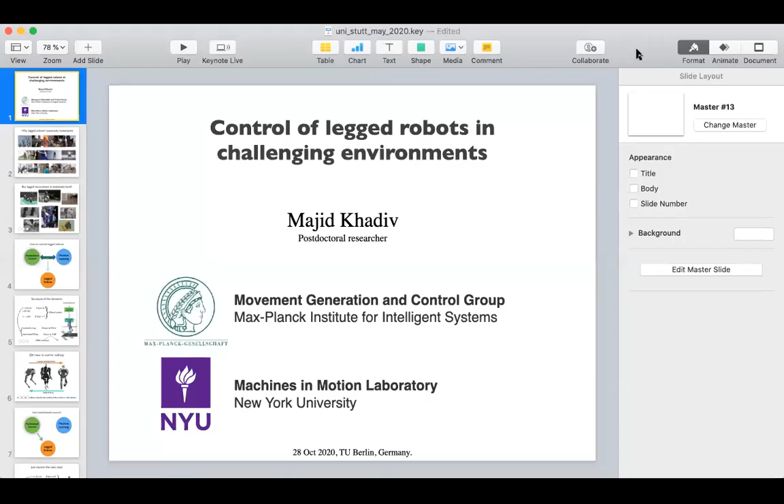Yes, perfect. Okay, great. Thank you so much for having me today. So today I'm going to be talking about control of legged robots, especially in challenging environments.

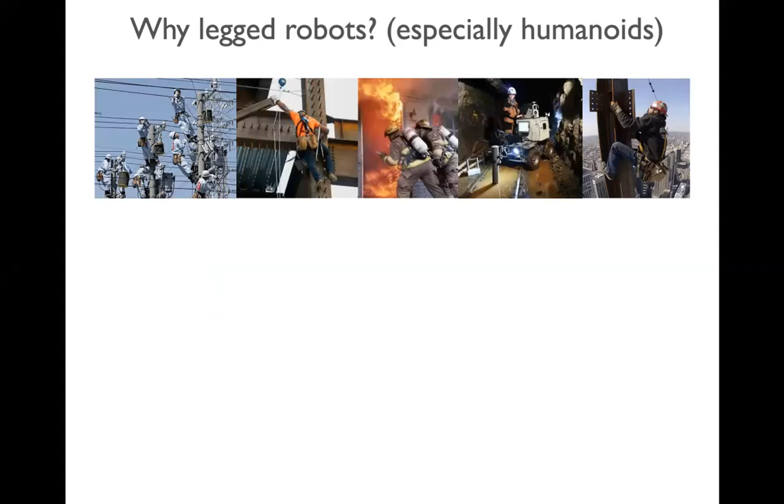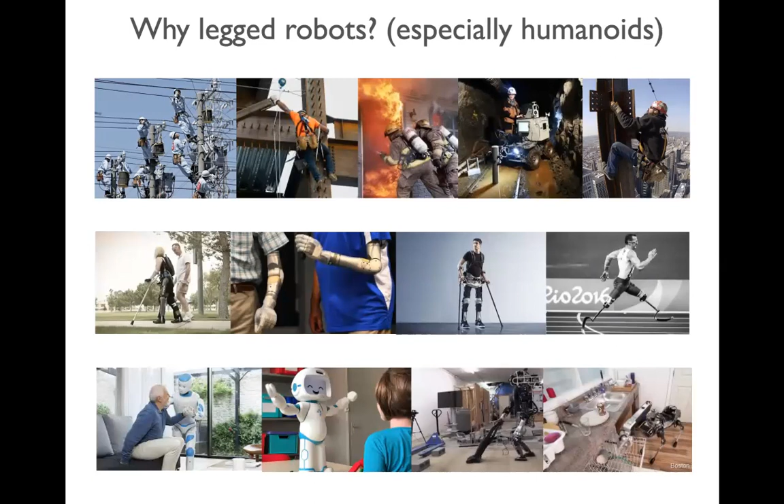But the first question is, why legged robots? If we look around ourselves, we can see that there are a certain number of jobs out there that are very dangerous for human beings, but at the same time, they need a certain amount of dexterity like human beings. The research we do in legged locomotion and the knowledge we gain can be used to design and build exoskeletons and prosthetics. Also, humanoid robots can help elderly people, they can be used to teach our children, to entertain them, used in home care services and so on and so forth. So with this picture, we can see that there is a huge amount of applications out there for these robots, given that these robots are able to show some performance close to or comparable with human beings. But the problem is that legged locomotion is extremely hard.

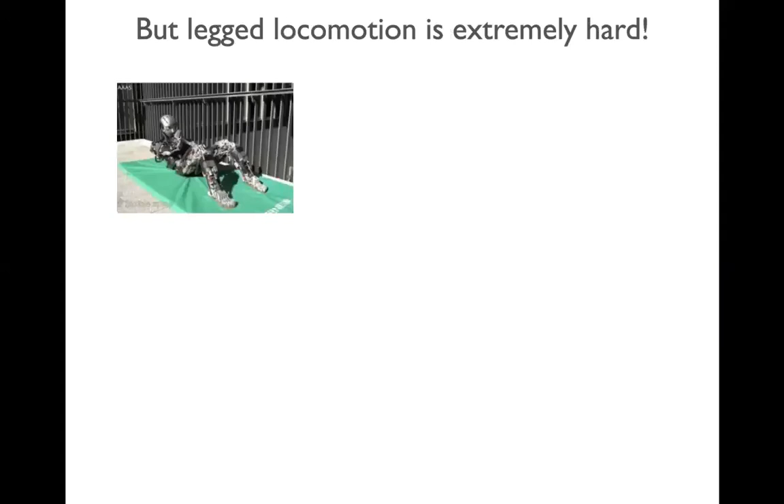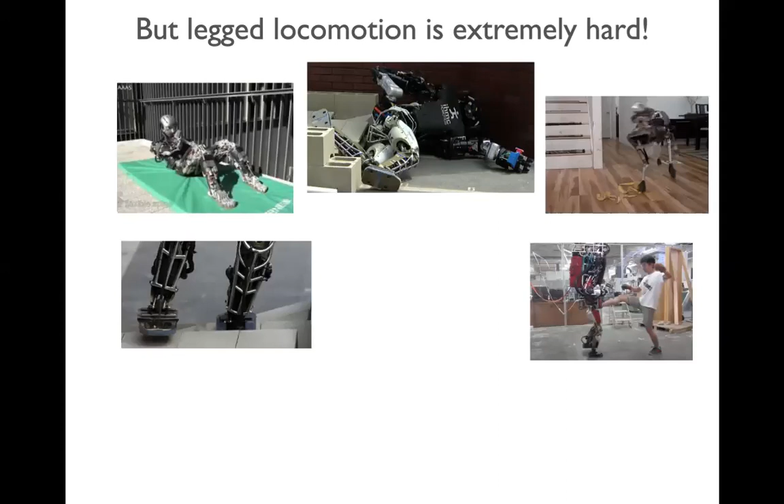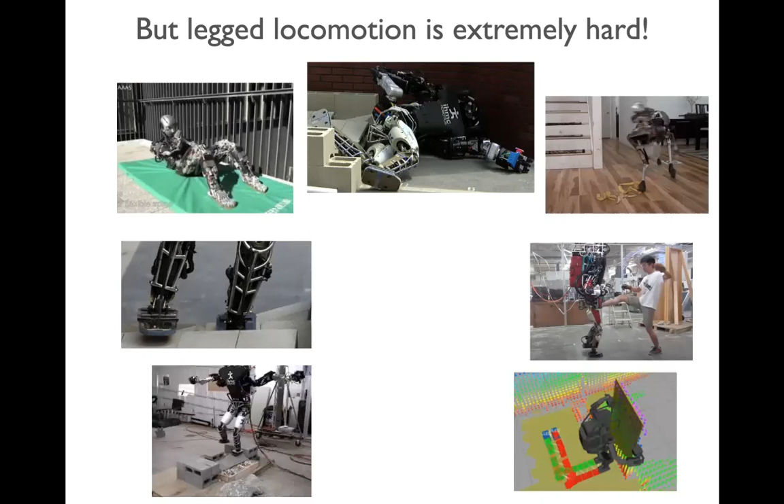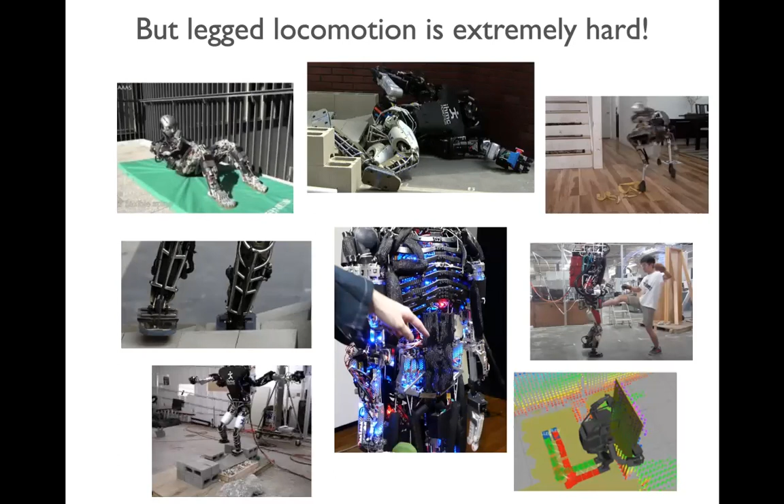Why is it hard? Because first of all, these robots have unilateral contacts with the environment with different parts of the body. They are inherently unstable, which means they can easily fall down if not controlled properly. They have state-dependent switches, and they need these switches in order to move their body in certain directions. They can be prone to external disturbances, environmental uncertainties, perception uncertainties. Also, the contact forces can be even more limited in certain situations. And finally, these robots have many sensors and actuators, and these should be working simultaneously, synchronously, such that the robot is able to achieve a desired task. So it's really hard to control humanoid robots in general.

The way I tackle this problem is by using a combination of model-based control and machine learning to control legged robots. Okay, let's take a look at the structure of the dynamics.

These robots have a continuous part of the dynamics, which is an ODE, and we have a constraint on the actuation since actuation has some limits. This is valid as long as the robot is not on the switching surface. But as soon as there is a switch in the contact location, there is a switch in the dynamics, and the robot might experience a jump in the states, which is due to impact. So this system is in general a hybrid system.

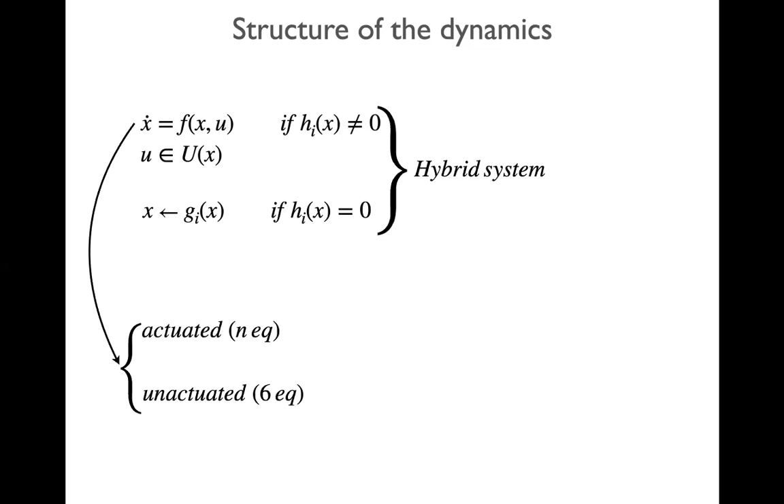If we take a closer look at the continuous part of the dynamics, we can see that we have an actuated part and an unactuated part that we can separate. The actuated part is simple, it's like manipulator dynamics. So we have torque at the joint, and we can use this torque to exert force to the environment. So this part is fine.

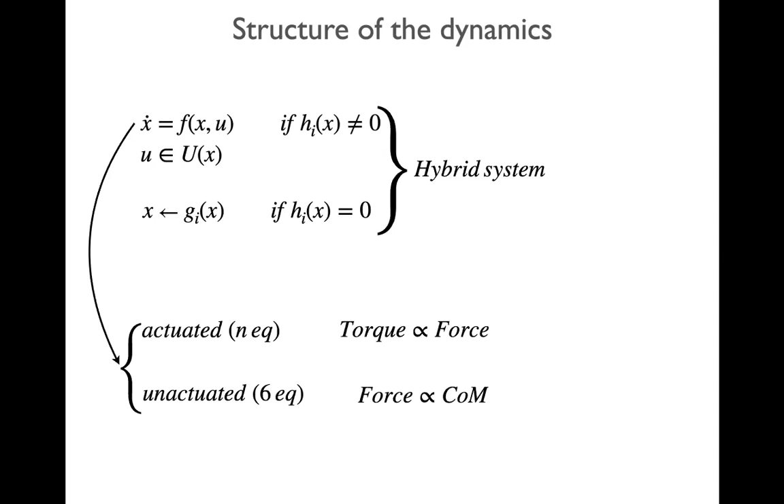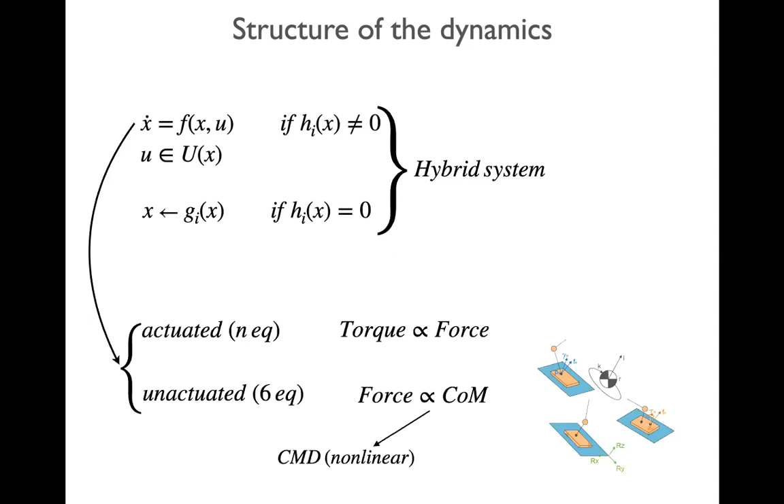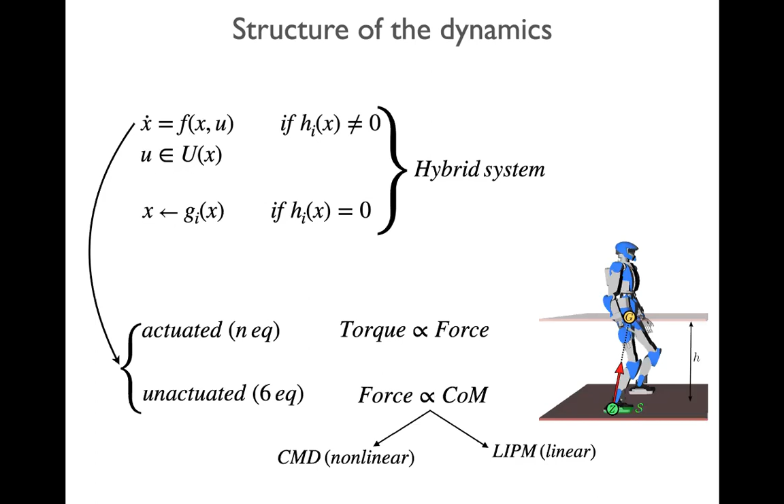The unactuated part is the main problem, since we need to exert some limited amount of force to the environment to control the center of mass motion. These dynamics can be captured using centroidal momentum dynamics, which says in order to control the center of mass, we need to control the sum of contact forces on the environment. So this is a nonlinear, non-convex dynamics in general. However, there are certain linearizations or simplified versions of this dynamics. For instance, if we say the height of the center of mass is fixed and there is a negligible rate of angular momentum around the center of mass, we can use a linearized version of this dynamics to plan motion for this robot.

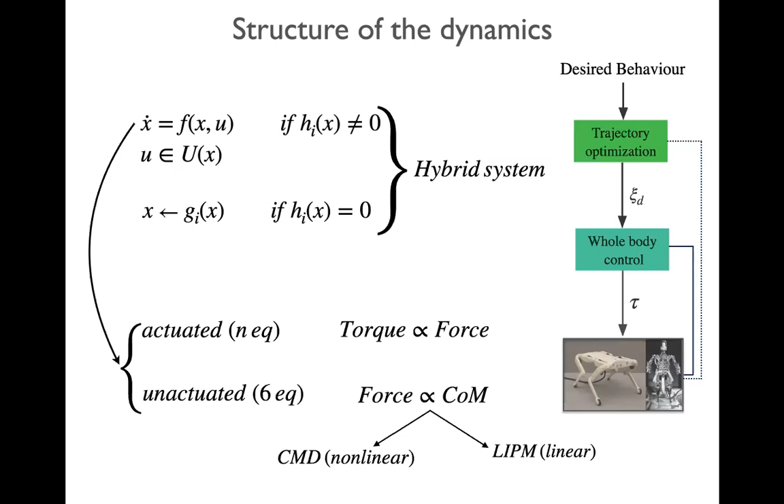And this is the normal control pipeline we use to control these robots. So we are given a desired behavior, we generate trajectories for the most important parts of the robot, which are the end effectors and the center of mass. Then we have a whole body controller that stabilizes the system around this trajectory using feedback. The trajectory optimization part can be done either offline, but if we can regenerate motions very fast, we can use it inside an MPC loop.

So the first question I would like to tackle in this talk is how to control walking. We have different types or different designs of humanoid robots in terms of leg design.

On the right, for instance, you can see Hermes, which is a fully actuated robot with ankle joint, with toe joints. All of them are actuated, and the system is kind of heavy, but it has full control authority and the contact forces.

So the problem with this robot is that the leg is heavy, so we cannot achieve very dynamic motions. On the left, however, you can see a minimal design of the leg. So the robot doesn't have any ankle joint, it doesn't have any ankle actuation, the legs are light, so it should be able to do very fast motions.

But at the same time, the control of contact forces becomes very challenging. The robot might rotate around the normal axis to the environment because there is not enough rotational friction available for this robot.

So a trade-off design would be the robot in the center, which has unactuated ankle, but it has a foot, and this foot can generate the rotational friction, but we don't have full control authority at the contact.

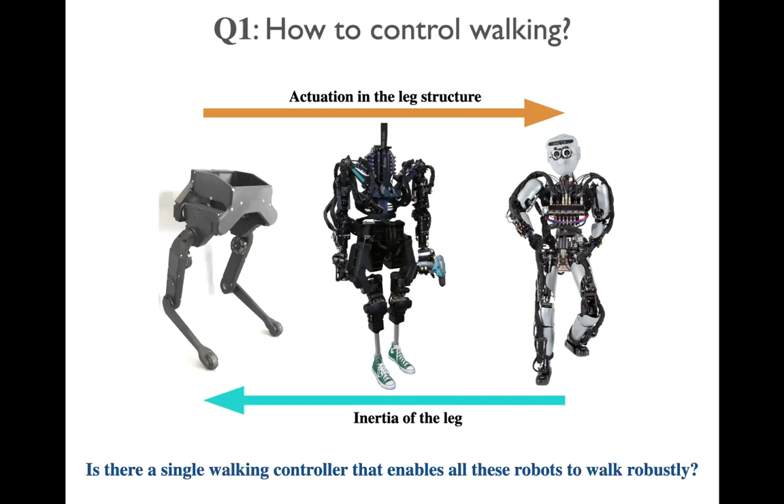The question I would like to answer is, is there a single walking controller that enables all these robots to walk robustly? My answer or my approach to this problem is model-based control.

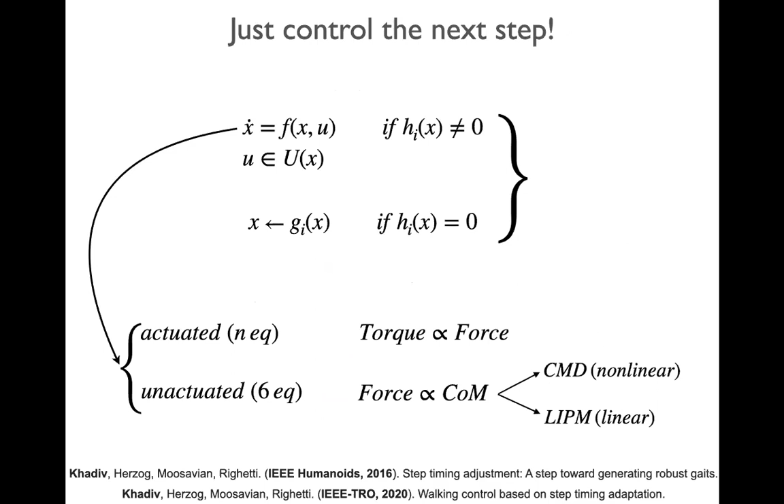So if we go back to the equations here, because we want to tackle only walking, we would resort to using simplified dynamics, which is LIPM, which is a very good model for walking motion. And here the idea is that rather than controlling the continuous part, we only rely on the switching part of the dynamics to control walking.

So the idea is that if we only control the location and time of the next contact switch, we should be able to control walking and stabilize the unstable dynamics of the center of mass.

So this is the main idea here, because we want to control all these robots, and some of them don't have enough control authority to control, for instance, center of pressure. So what we propose to do is to only adapt next step location and time as a function of feedback to control these robots.

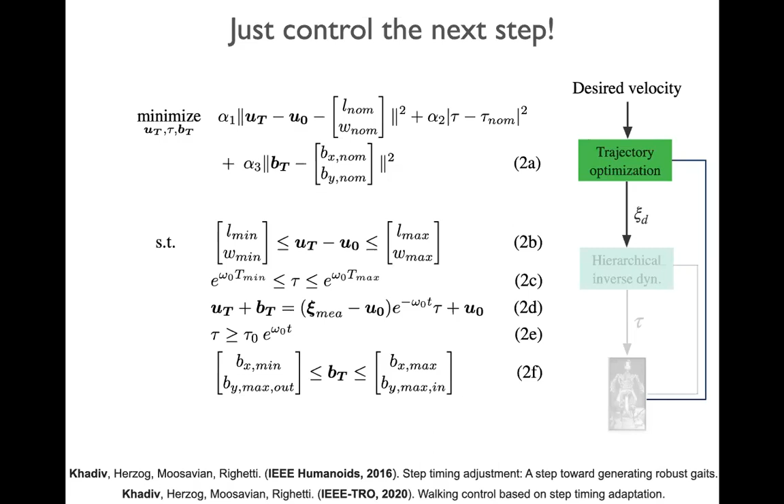And with this formulation, we can adapt very fast next step location and timing. We can then find the swing foot trajectory to land at a certain time, at a certain position. And finally, we pass all this trajectory to a whole body controller.

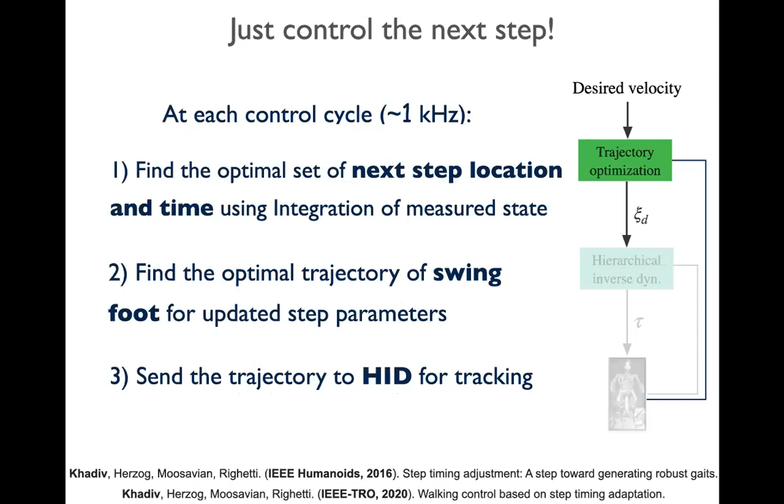Here, we use hierarchical inverse dynamics for tracking these trajectories. I implemented this on a robot in simulation.

And here the ankle is not actuated. We were able to generate very robust motion in the presence of different external disturbances, just by adapting next step location and timing using the measurement of the center of mass states.

So the main thing that we showed in this work is that timing adaptation is really important. It had been ignored normally because it renders the optimization problem non-convex. However, we showed that with this novel formulation of the problem, we can find a convex optimization problem that adapts both step location and timing.

And this timing adaptation gives a kind of exponential push recovery capability compared to not adapting it. So the features of the planner: there is no need to explicitly control center of pressure or center of mass. So we don't care so much about the continuous part of the dynamics.

We are able to, just by looking at the next switching manifold, which is the next step location and timing, guarantee viability, the ability to ensure there is at least one control sequence or solution to the problem that doesn't lead to failure. And finally, we can do very fast replanning with step timing adaptation.

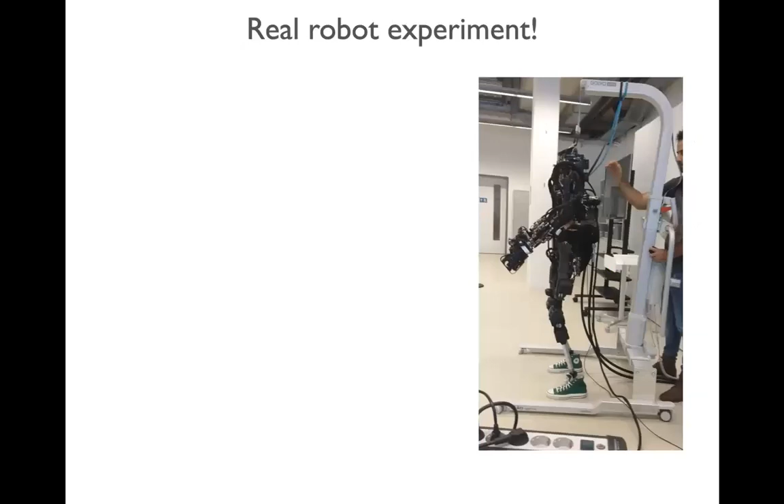I started to implement this on the robot, and this is how far I could get. The robot is doing only balancing here with inverse dynamics. We couldn't go further because of many hardware problems we had. I need to be very careful with these robots, which are hydraulic, as you can see in the video. We also need a couple of people to work with this robot, so it's really hard to manage and do fast, dynamic experiments on the system.

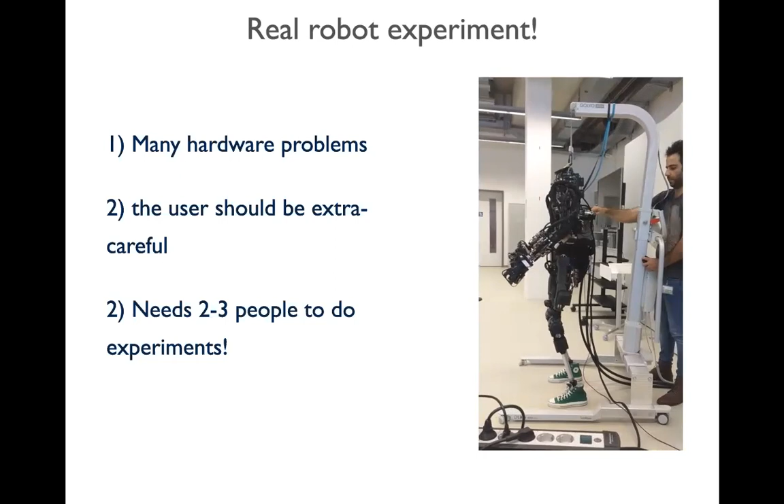So this year, with Felix Grimminger, a mechatronic engineer in our lab, we wrote a proposal to build a new biped robot that is easier to handle. It's based on off-the-shelf torque control components and 3D printing materials. The idea was: can we build a robot able to do very dynamic motions like this?

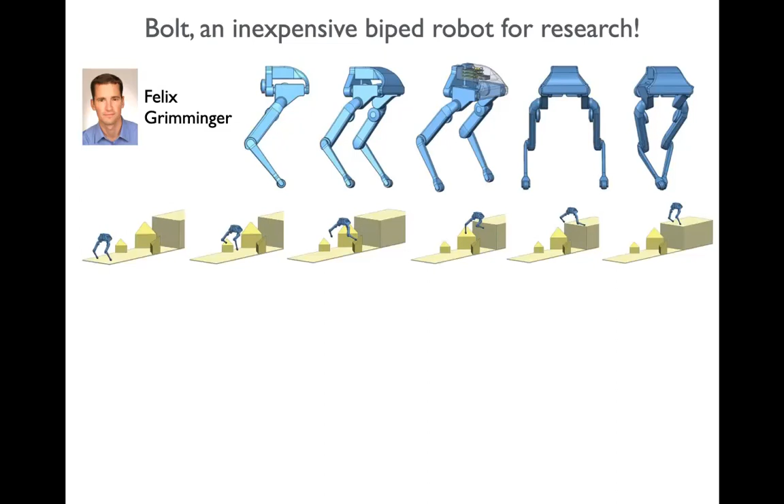We built the robot in February, and this is the first test we did on the robot in March. Finally, a couple of weeks ago, with the help of Elham, a bachelor intern in our group, we implemented the algorithm with a bit of modification on the real robot.

So this is the robot Bolt. It is stepping forward and backward in this video by only adapting next step location and timing based on the measurement of the center of mass dynamics.

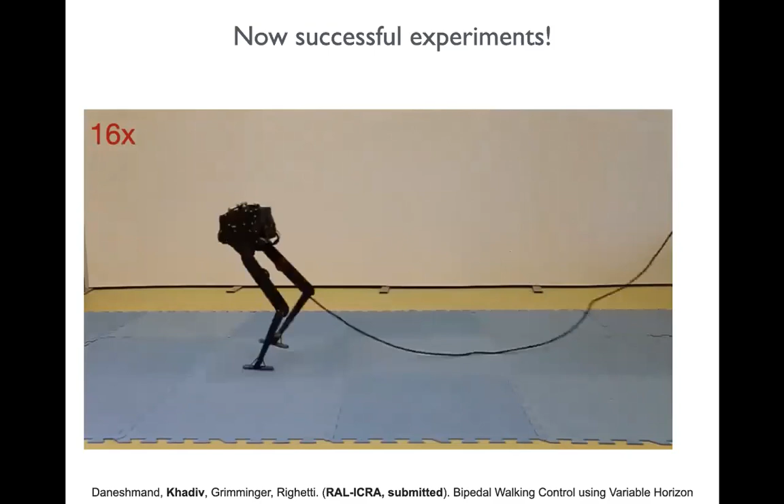This is, for instance, 10 minutes of testing without any pause, and the robot is stepping robustly, tracking the velocity forward and backward. Also, sometimes I pull the robot using this wire as a disturbance.

The second experiment is uneven terrain. The robot is not aware of all these obstacles and the path. But thanks to the torque control and adapting next step location and timing, the robot is able to deal with this kind of uncertainty.

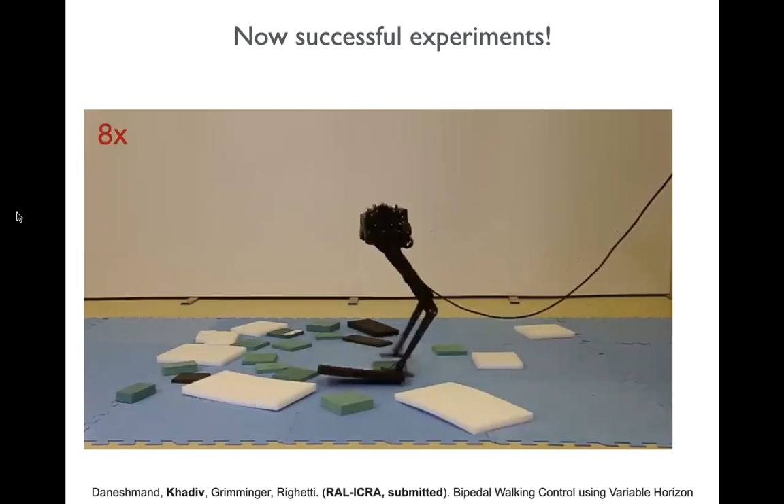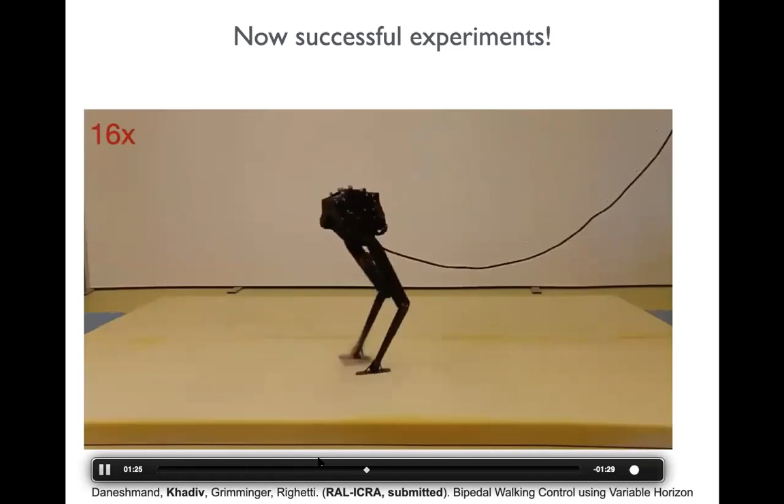I'll move forward a bit. The third surface is a soft surface. In the controller, we assumed that the surface is rigid, but here we have a kind of soft surface that causes a bit of oscillation in the robot motion, though the controller was robust enough to deal with this uncertainty.

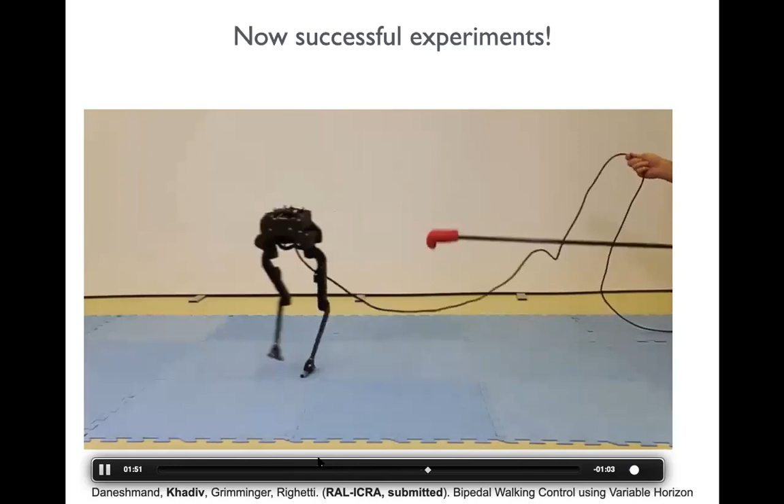Then we have some push recovery scenarios. We are pushing the robot in different directions, but thanks to the MPC implementation and very fast replanning, we are able to adapt the next step location and timing to recover from this disturbance. Here is the push recovery in the sagittal, or frontal, plane.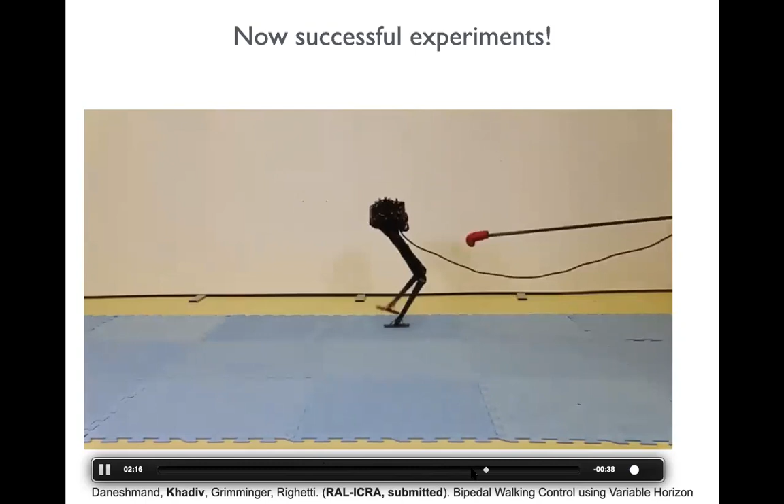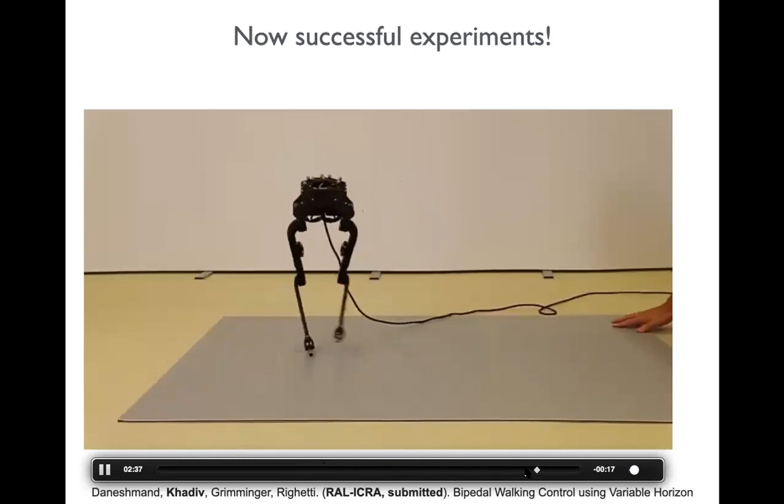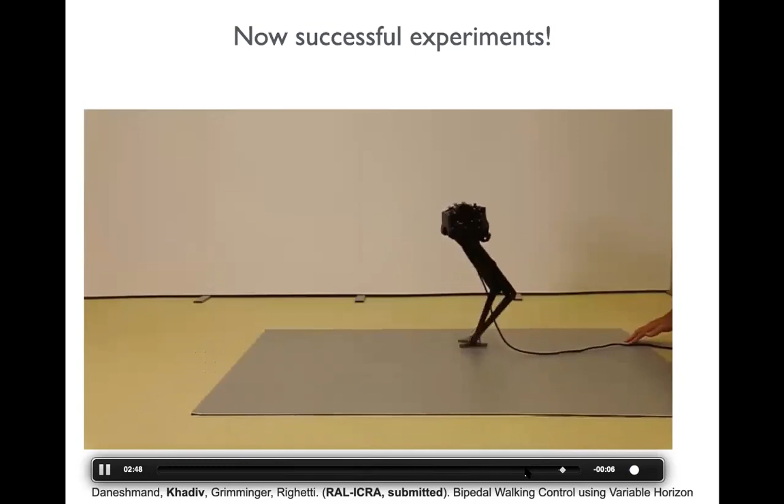Finally, we have slippage recovery, which has not been done in the literature on bipedal robots because it's a very challenging task. But our controller is able to do this. I'm moving the platform randomly, and the robot is able to adapt its next step location and timing to recover from this disturbance.

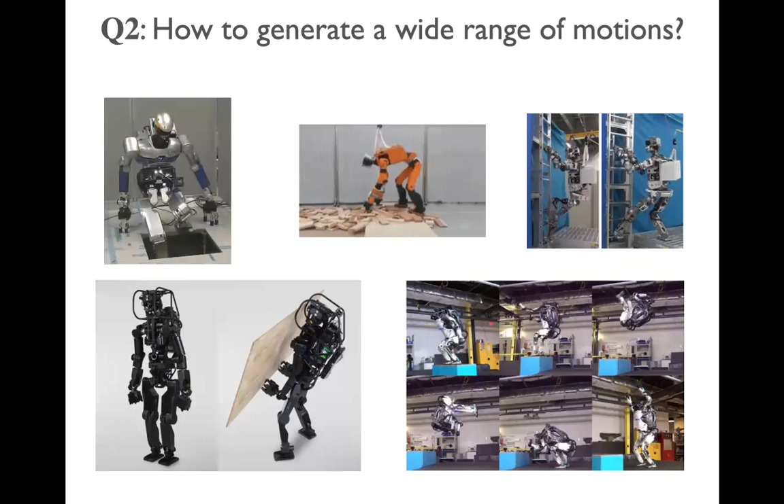Okay, how about if we want to generate more complex motions? If we want to do multi-contact motions with legged robots, climb a ladder, manipulate an object while walking, or do very dynamic motion with a flight phase, like a backflip or something like this, we can no longer use LIPM. Again, I propose that we use model-based control.

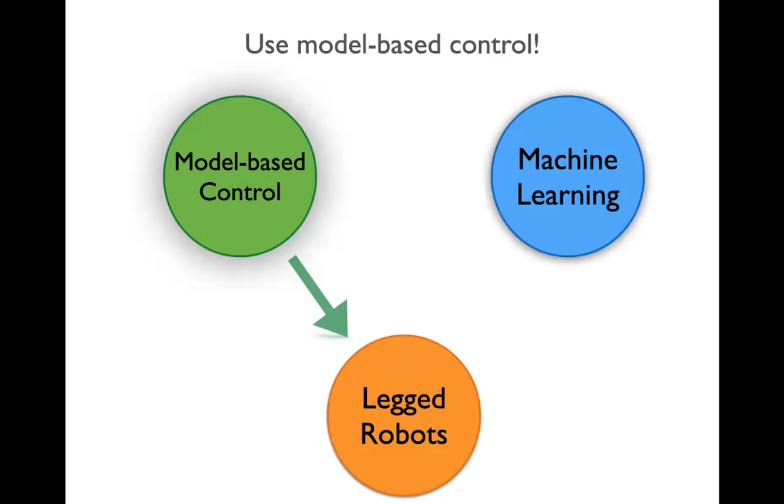Here, rather than LIPM, we use the full centroidal momentum dynamics, which in this case is non-convex and non-linear. We also need to control the continuous part of the dynamics, because we need more control authority on the motion, since these motions are more delicate than walking.

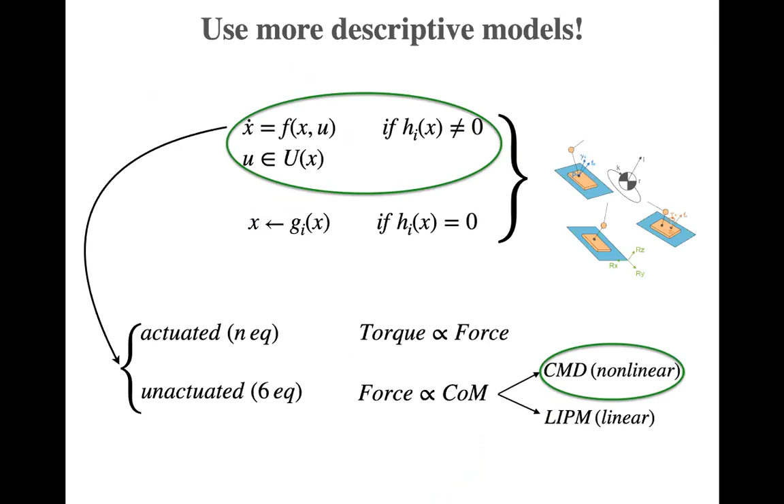For the trajectory optimization part, we write down the centroidal dynamic motion planner. The main thing here is that we want to generate trajectories for the center of mass, momentum around the center of mass, and contact forces. The main constraint of this problem is the centroidal momentum dynamics, which is non-convex, and the rest are some linear constraints that we can enforce.

Thanks to the solver that Brahayam, a PhD student in our lab, developed, we can solve this non-convex problem using a sequence of convex approximations that helps us solve it very quickly.

Then, once we have a trajectory for center of mass and momentum, we can do one full pass of whole body inverse dynamics or inverse kinematics around this problem, and we enforce the whole body constraints like joint constraints, torque constraints, etc.

By iterating between these two solvers, centroidal and whole body, we try to come to a consensus in terms of momentum around the center of mass. As soon as they come to a consensus, it means we have a trajectory that is consistent with the constraints in terms of contact forces and whole body constraints, like joint torque, position, and velocity constraints.

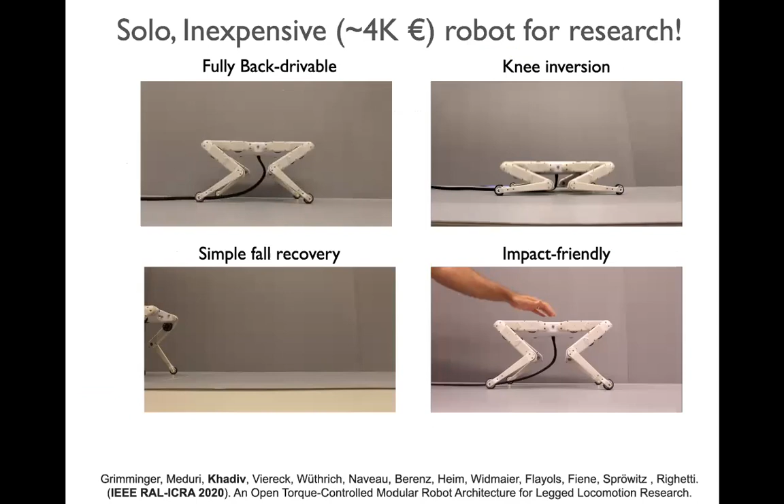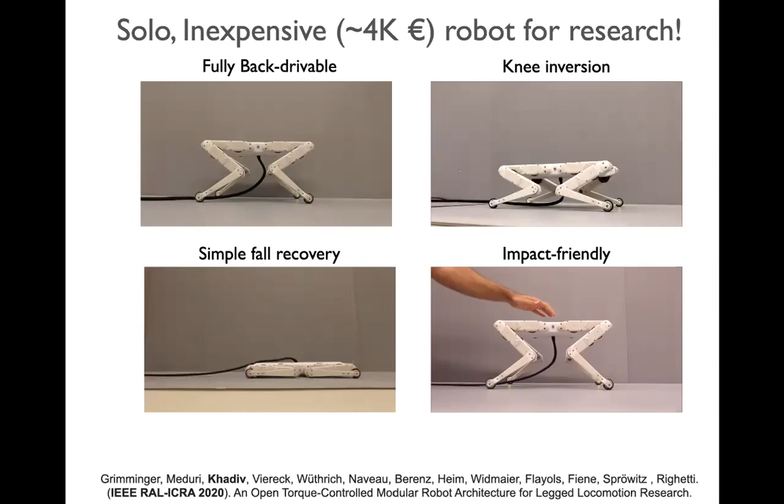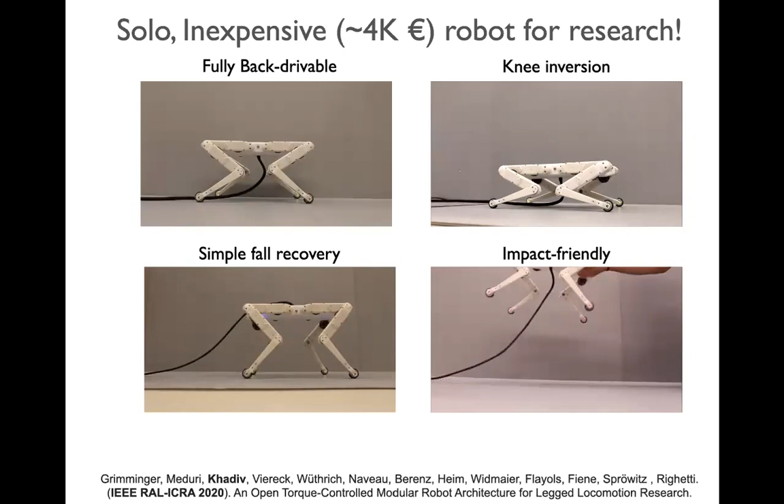It's back drivable, which means it's torque controlled, so we can do torque control on this system. It can do knee inversion, which is useful to step onto an obstacle or move in a cluttered environment. It can do very simple fall recovery thanks to its design - the only thing it needs to do is flip the legs. Finally, the robot is really impact friendly, which means we are not afraid of generating very dynamic motions with impact. This helps us validate the capability of our planner on a real robot.

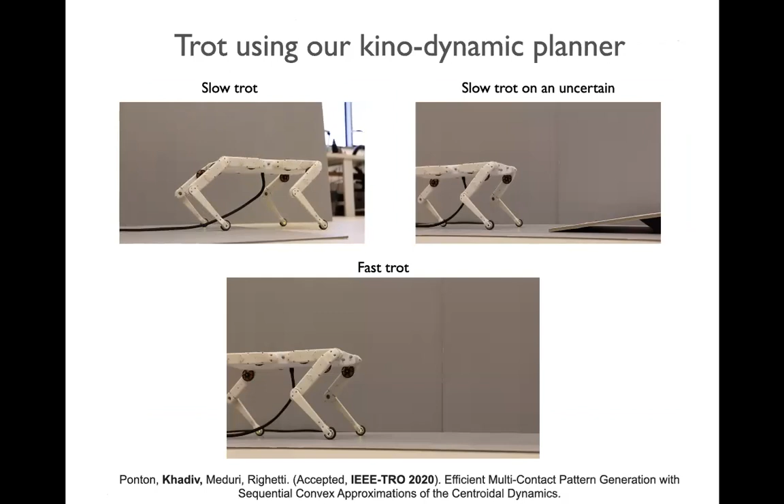I did the same test, but here we put a seesaw on the path of the robot. Thanks to the feedback control, the robot is able to adapt to this unknown environment.

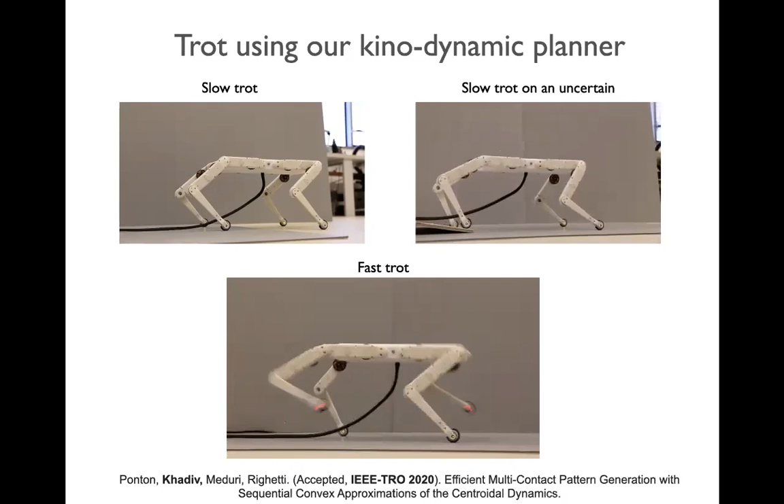And finally, this is a faster trot motion. Thanks to the full body trajectory optimization algorithm, even without replanning, we are able to execute this motion on a real robot.

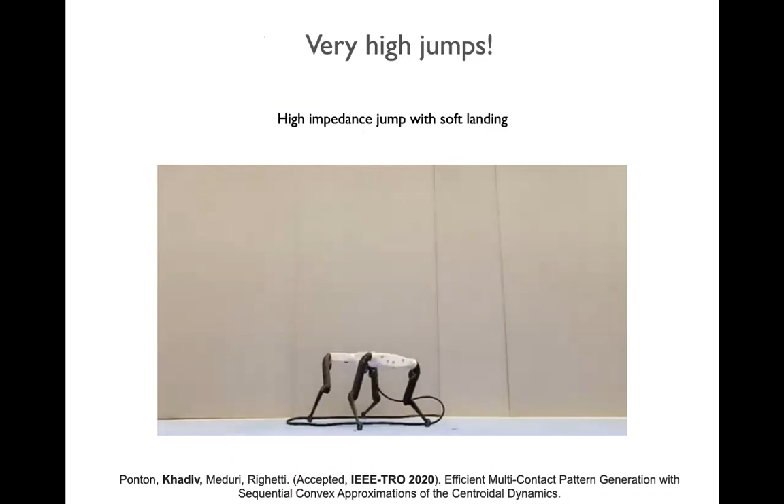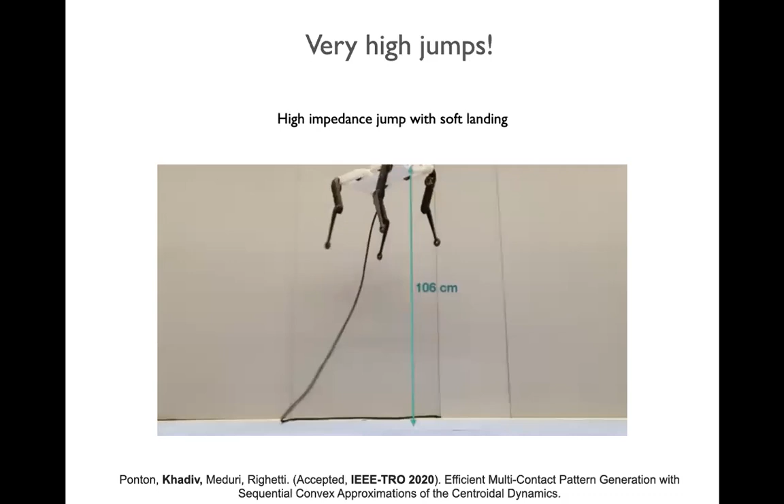So here I'm showing another motion, which is a high jump, to show that the planner is able to generate this motion and the robot is powerful enough to jump more than 5 times its standing height. The robot's standing height is 21 centimeters. We generate trajectories for the full body, and then track it using an impedance controller, and the robot can jump here more than 100 centimeters.

So the main point here is that thanks to the torque control, we can adapt or modulate the impedance or the gains during the motion. This is the key to having this kind of jumping motion on a real robot.

Because in order to push off and generate enough thrust to jump really high, we need really high stiffness during the first part of the motion and rather low damping. But for the next part, which is the landing part, we really need low stiffness and high damping such that there is no bounce and the landing is soft. So this is what we needed to do to have a clean jump on a real system.

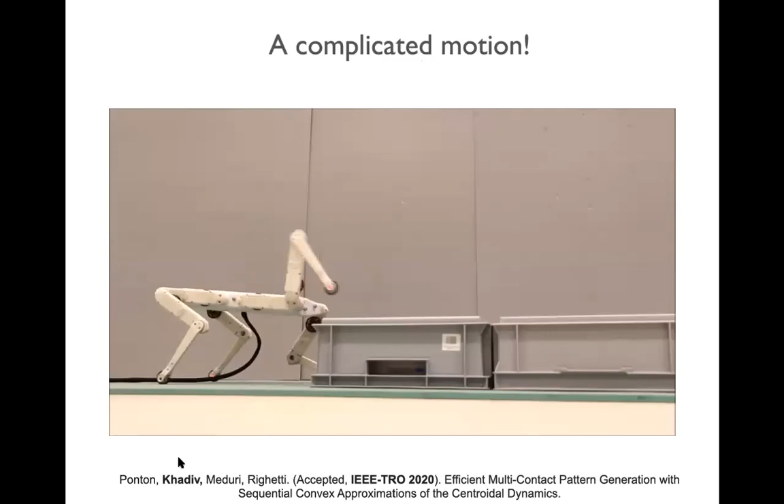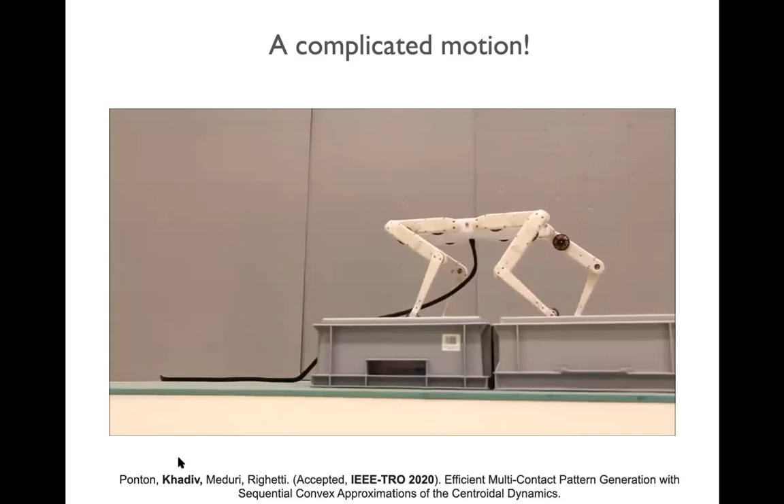This is another motion where the robot combines static and dynamic motion. First it's statically stable, it puts the feet on top of the obstacle, then it jumps on top, and then again another type of static motion. So again, for all these motions, we would generate the motion offline and then execute it using a low-level controller.

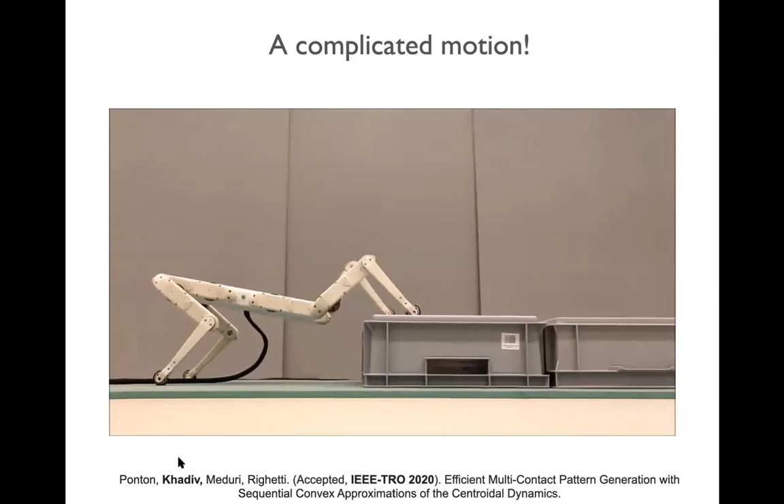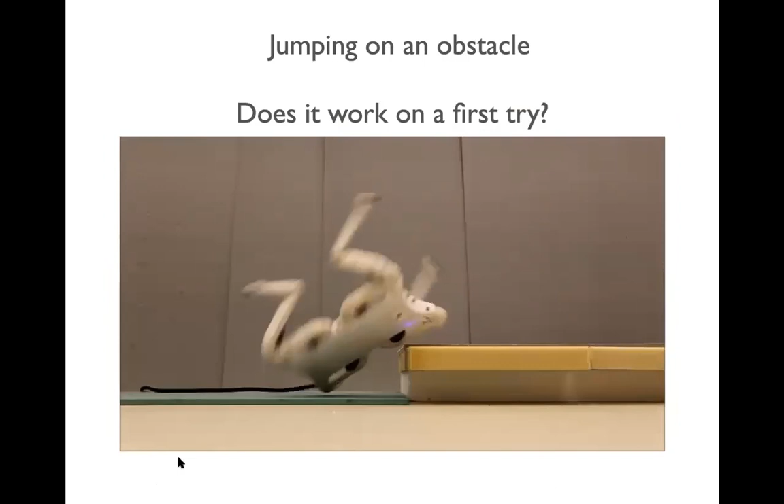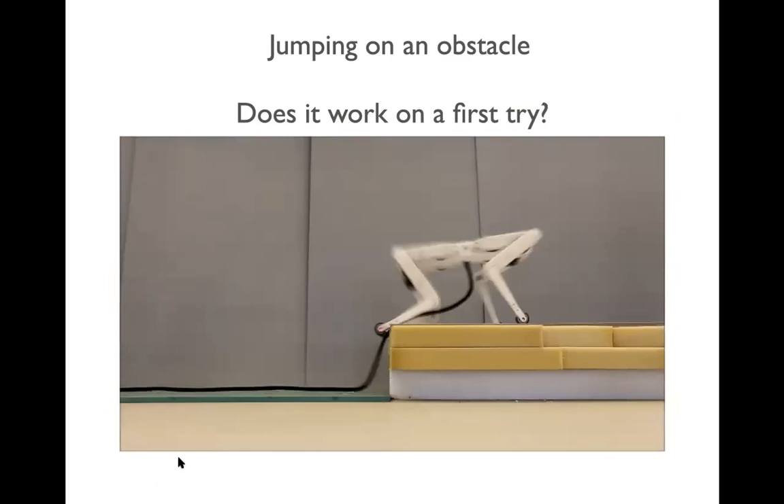But all of us know that these motions don't work at the first try. So what I would do is generate some motion, execute it on the real system, look at the motion and the data. I would adapt some parameters of the planner or controller such that eventually we achieve the desired motion. For instance, here is jumping on the obstacle.

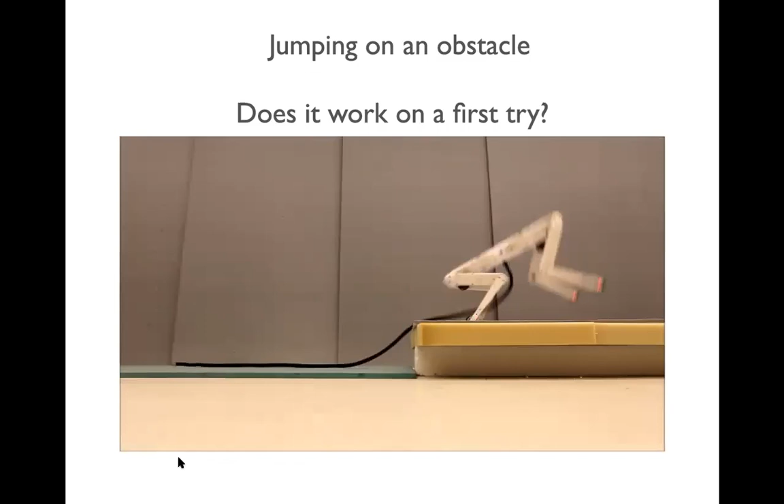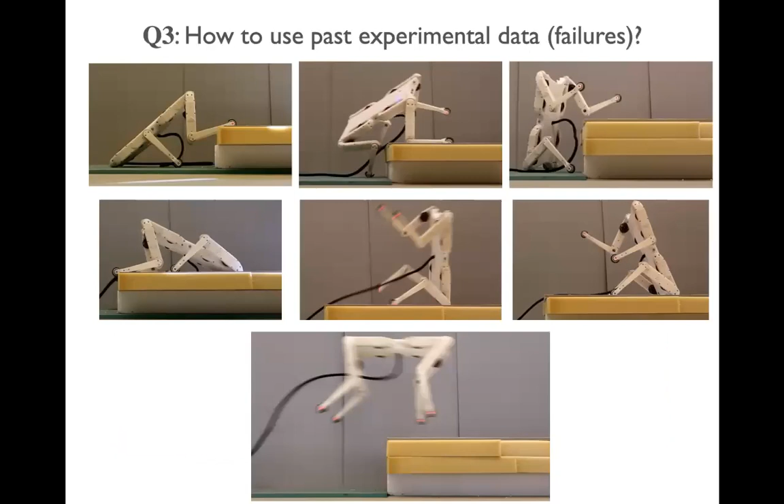So the third question I would like to answer is: could we use the past experimental data, or especially the failures, to come up with a real robust motion such that we achieve a robust motion in the presence of all the disturbances? And here is the place that I combine machine learning with model-based control to tackle this problem.

So here is the work we did with the master student, Muhammad, in our group. What we want to do here, again, the structure is very similar - we have two-level control. High level generates the plan, low level control tries to track the trajectories. But here what we propose is that we use Bayesian optimization to find the optimal cost weights of the planner, or a slow MPC, such that we have a robust motion. So normally what we do is have a constrained MPC.

So here I'm talking again about walking motion. I'm doing MPC using a LIPM for walking motion. And then for the low-level controller we used an unconstrained ILQG, but we can do whatever else, like inverse dynamics or impedance control. It's fine also. So writing down the cost of the slow MPC is the main point of the problem.

For the walking problem, we have one term related to performance, which is walking velocity tracking. We are given a command and want to track the desired velocity in a certain direction. Then we have interaction forces that are limited. For instance, for walking, we have center of pressure or ZMP that should be as close as possible to the center of the foot, such that the motion is robust in terms of contact forces.